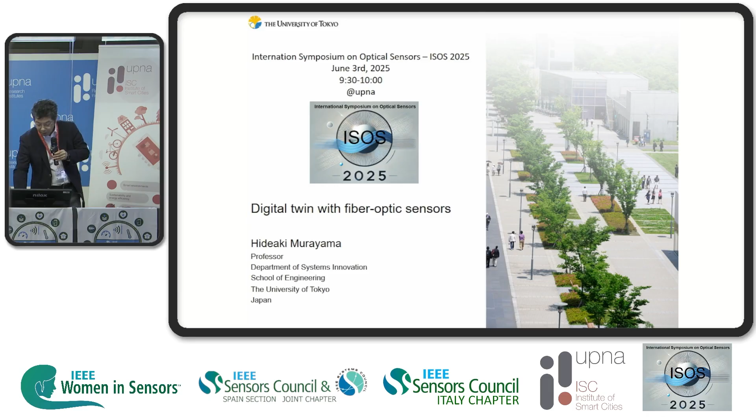But let me talk about my university. I'm coming from the University of Tokyo. It was founded about 150 years ago, and now we have about 30,000 students, and also 10,000 academic and administrative staff. An interesting thing is we have a lot of land. We own 0.1% of Japan, but our campus is very small. So we have a lot of forest, experimental forest for research, I think.

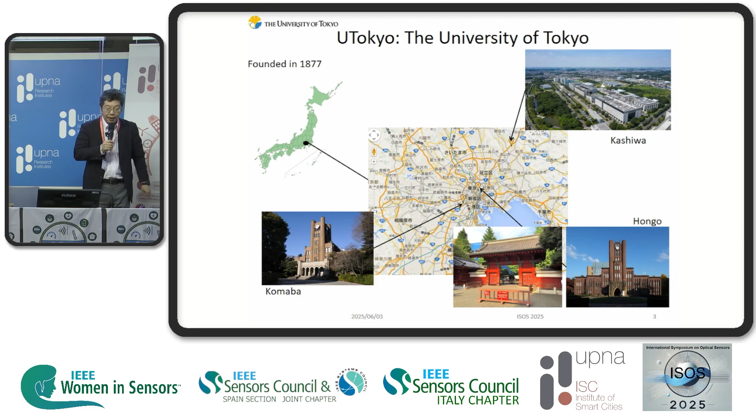As the chairman introduced, I was belonging to the School of Frontier Science, but this April I moved to the School of Engineering, and now I'm working for the School of Engineering. We have 3 campuses in Tokyo. Now I'm working in Hongo campus, and Daniel maybe knows the Hongo campus and Kashiwa campus as well.

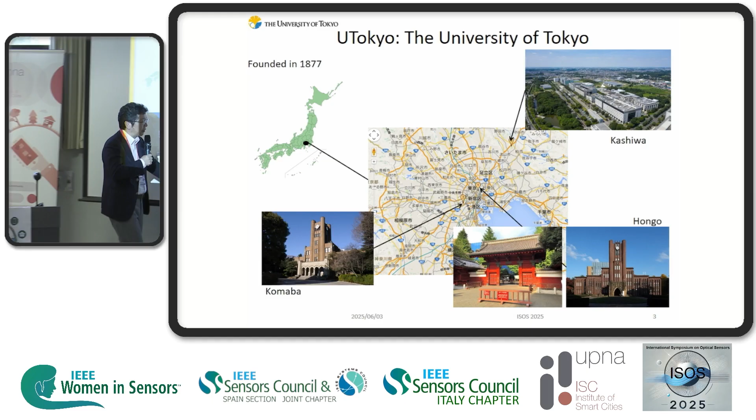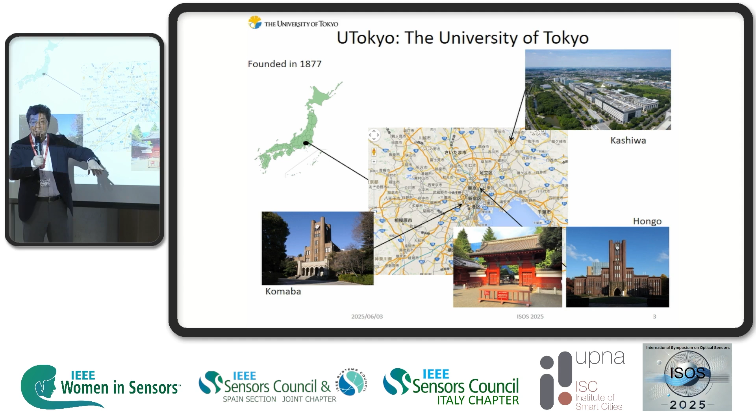Hongo campus is our main campus, and there is a famous gate in Japan. This is a red gate. We call it the Akamon. Aka means red, and mon is a gate. The Todai campus used to be the residence of a daimyo. Daimyo is a local king. So here used to be a big residence, and you can see the red gate here. This was built for the king's daughter, the princess, to go out of home for marriage.

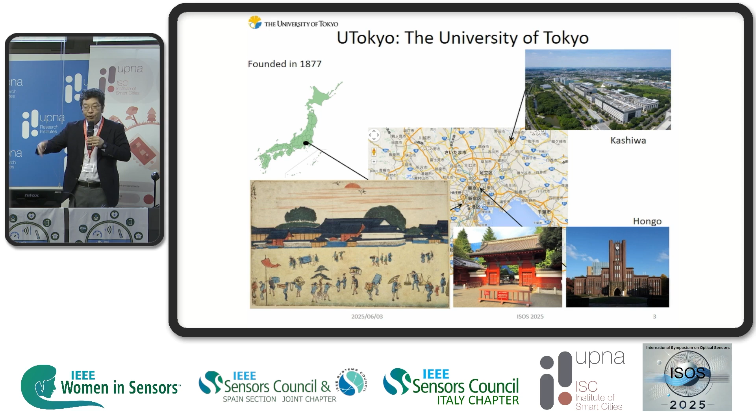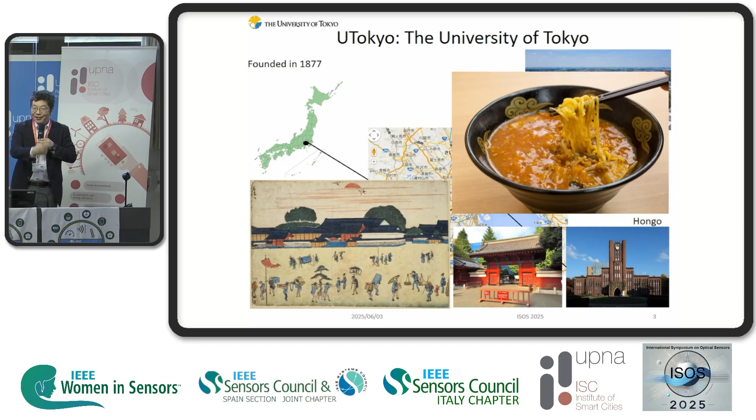And also this is a ramen, Akamon ramen, spicy, hot. So please, if you come to Japan or Todai, please try it. Very nice.

Please let me touch a little on the smart city issue. In Kashiwa, not me, but another professor has a project about a smart city with Kashiwa City, and they also have a smart city school for professionals, with students coming from industry and the government, I think. So they have a smart city school.

Today, of course, I talk about fiber optic sensors, and now I have a collaboration with NTT, which is the biggest telecommunication company. Today, I will talk about the collaboration with Kajima and Sekisui. Kajima is a construction company, and with Sekisui we are developing a pipe with a fiber optic sensor. It is a chemical company.

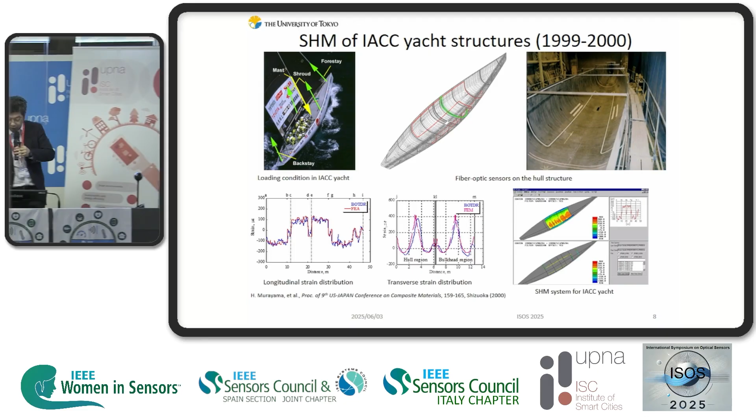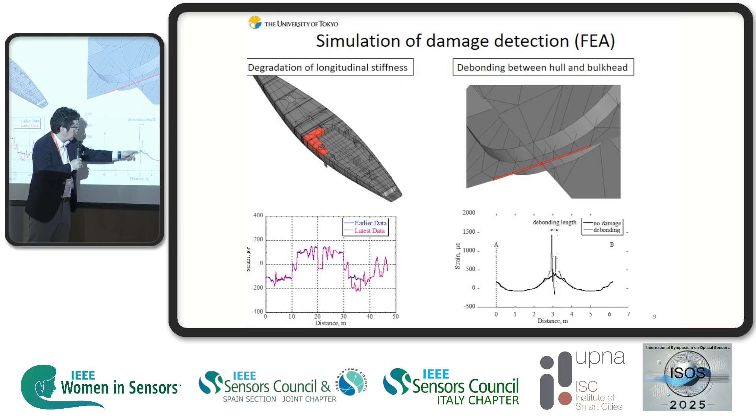But fortunately or unfortunately, we didn't have any damage. So in this case, I put damage in a computational model. If this is a bulkhead, and there is separation or debonding between the bulkhead and the hull, when the mast is pushing, we can see this kind of steep strain change. But if we measure strain, we cannot see any change.

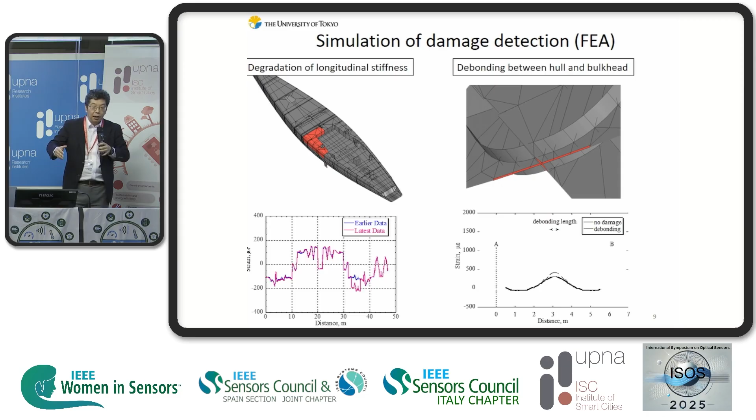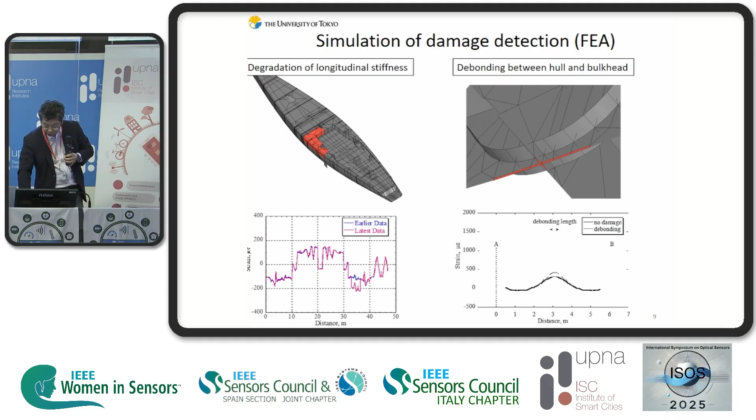This is because of spatial resolution. At that time, the spatial resolution of BOTDR was 1 meter. So basically, our strain information is averaged over 1 meter, and we cannot see this kind of steep change. So we need a higher spatial resolution. That was the story 25 years ago.

But in 2001, just after the America's Cup yacht race, we found this article. A researcher at NASA Langley Research Center published this paper. They are using OFDR, optical frequency domain reflectometry. In my case, I used BOTDR, that is Brillouin optical time domain reflectometry. In this case, they are using fiber Bragg gratings.

They put 800 fiber Bragg gratings along one fiber, and they can measure strain at each grating. The next year, 2002, we developed basically the same, but we used a long-length grating, 100 millimeters long. A typical gauge length is 1 centimeter. We can make such a longer grating continuously along the optical fiber, so we can measure strain distribution continuously. In our case, spatial resolution is 1 millimeter, so 1,000 times that of BOTDR.

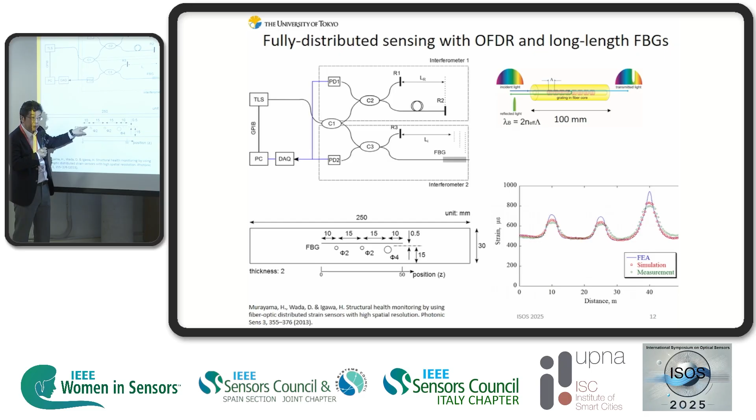If we use this kind of technique, we can measure strain distribution very precisely. This is an aluminum plate with 3 very small holes, with diameters of 2 millimeters, 2 millimeters, and 4 millimeters. Here strain concentration happens, and strain can be larger, like this. By BOTDR, we never know this kind of change, but when we use this technique, we can know the small change like this.

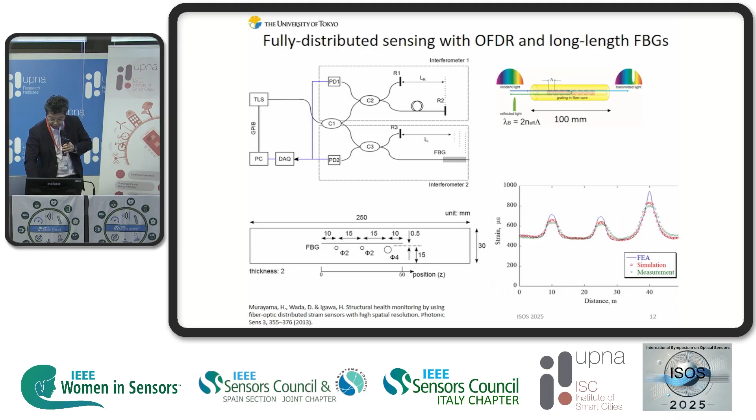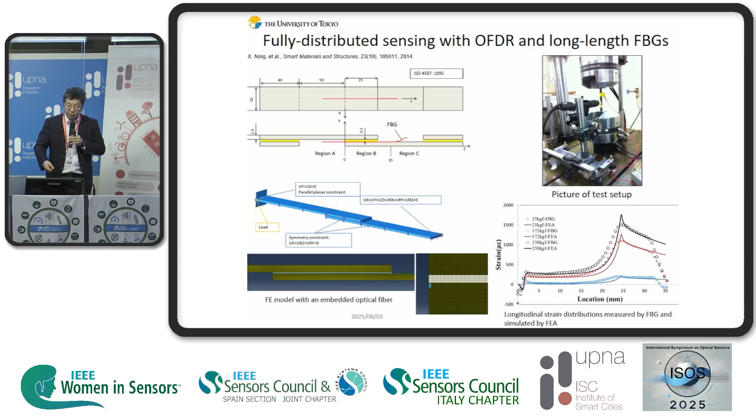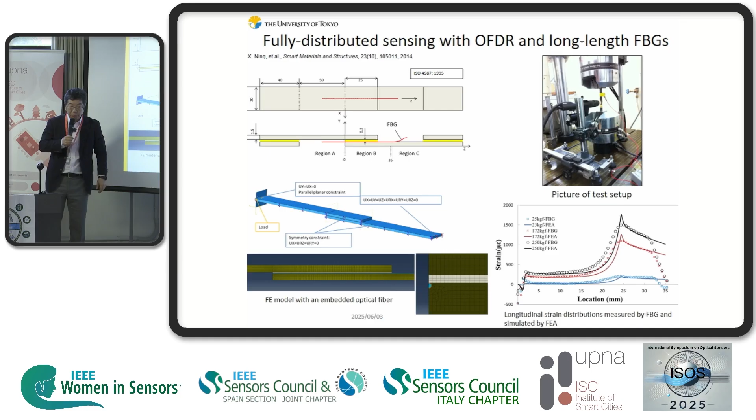Another good thing about fiber optic sensors is that we can embed them into the material. In this case, we embed the fiber inside the adhesive layer. We can calculate strain distribution by using the finite element method or a numerical calculation method, but nobody knows the actual strain distribution, and we can know that. And also, we can monitor strain distribution in real time like this.

And maybe, as Manuel said, there is a problem of cross sensitivity between strain and temperature. So if we add strain and temperature at the same time, we cannot separate them.

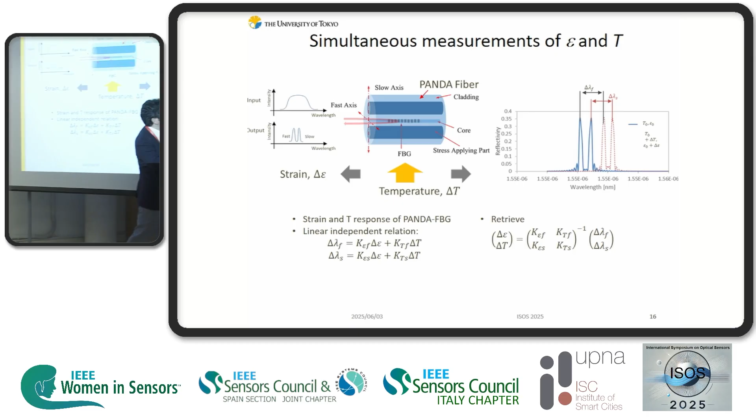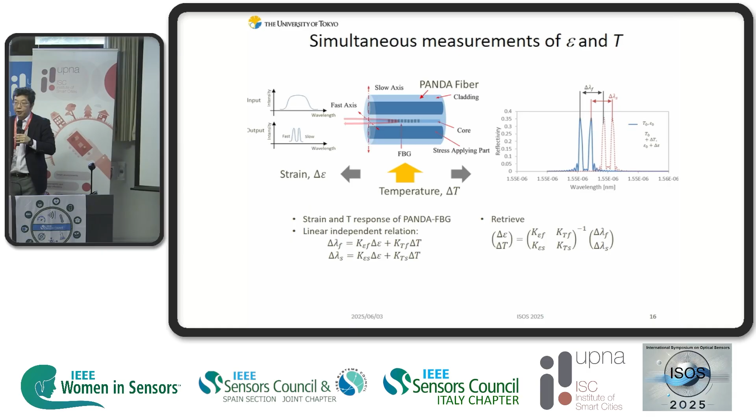That is a problem. So in our case, we can use a Panda FBG, which is a kind of polarization maintaining fiber. If we use this, we can observe a spectrum with two peaks, and these two peaks have different sensitivity to temperature and strain, so we can separate them.

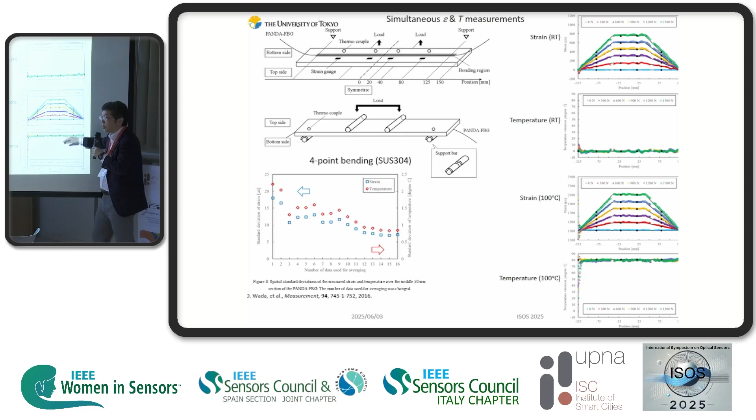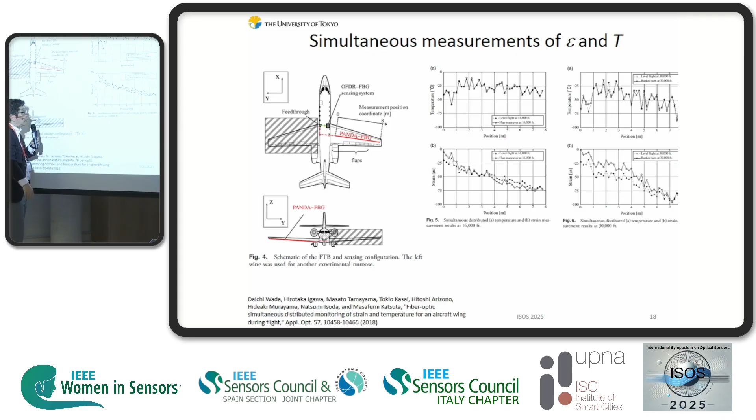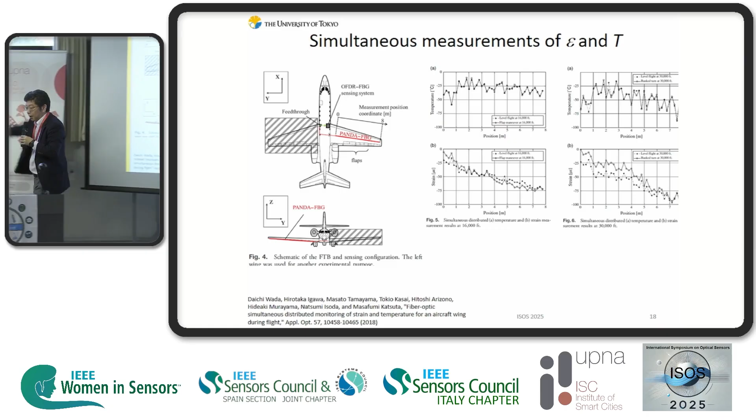But in the laboratory, we can have this kind of good, precise result. But when it comes to the real world, in this case we put an optical fiber sensor along the wing, and this is the strain distribution, and those are temperature. So in this case, 16,000 feet, and that is 30,000 feet. Altitude is different, and there you can see there is variation.

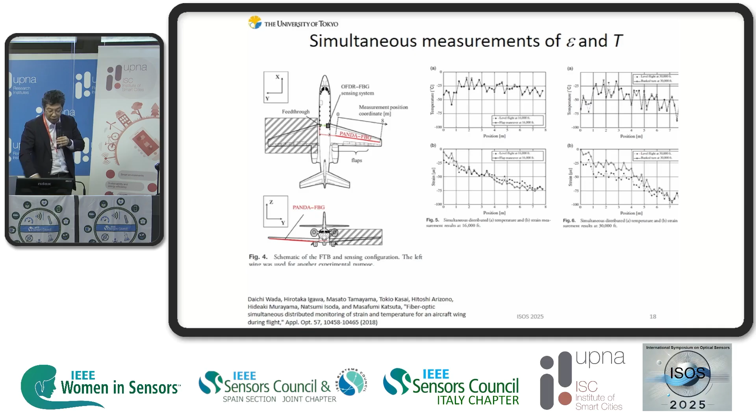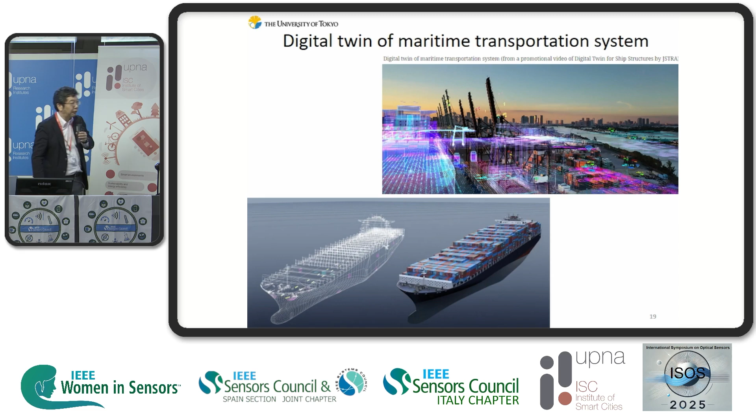I don't think this is real, so this has some error, I think. So I'm still working on that. And sorry, maybe I have to go to the digital twin issue. So now we are applying fiber optic sensors to develop a digital twin. We are developing a digital twin for ship structure.

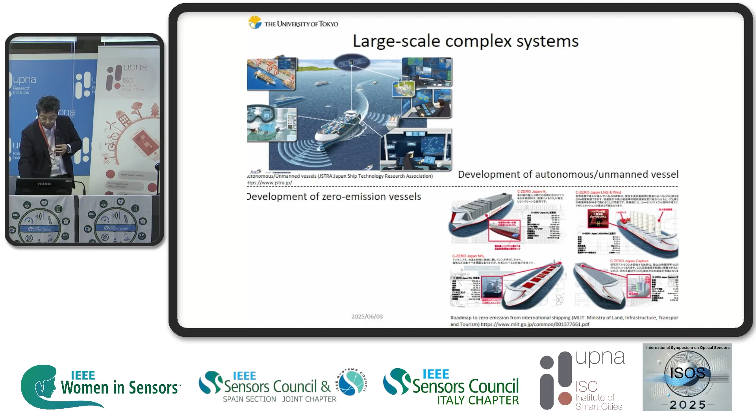So in the maritime sector, we have needs, demand for decarbonization and automation. And ships can become complicated. So we need to monitor remotely or automatically. That is a requirement. And also, ships are becoming larger and larger. So if we have an accident, it's very terrible.

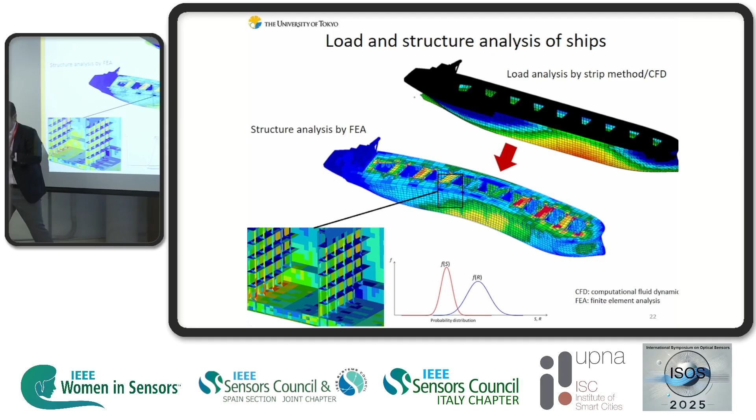So in the design phase, we do a lot of calculation, and we know the load and stress distribution on the hull of the ship. We look at this strain distribution, we check, and we say this is good. But in reality, we never see this. Maybe we could not see this. So our concept is very simple. We want to see this in a real structure. That is our digital twin.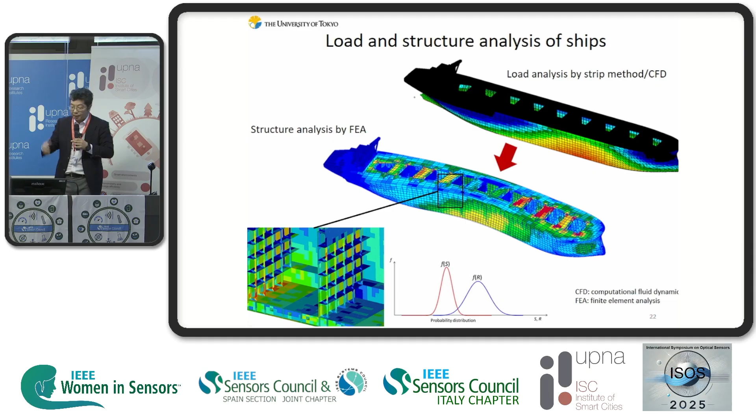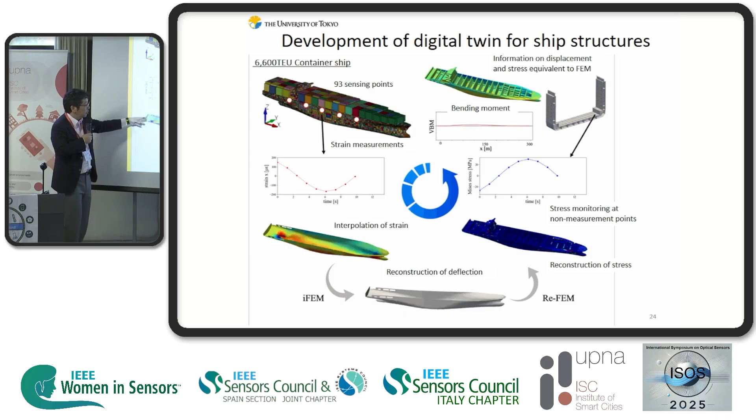And this is our procedure. We put sensors, basically fiber optic sensors like FBG, and we measure strain at a number of positions. And we do some calculation, basically iFEM, which means inverse finite element method, a kind of inverse analysis. We can calculate strain distribution from deformation; this is a direct analysis. But when we calculate deformation from strain, this is an inverse problem. So we use an inverse analysis.

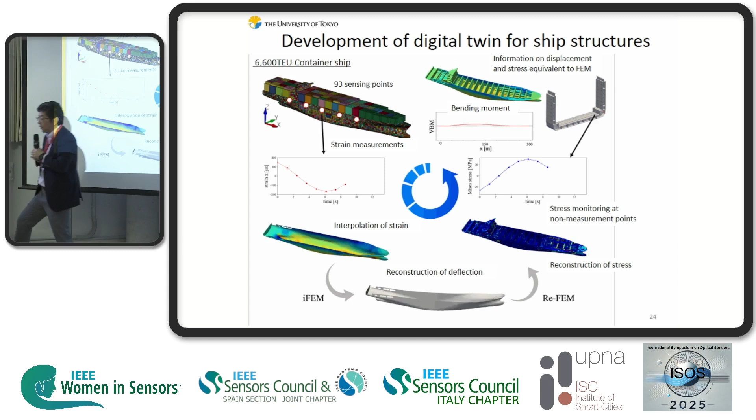But if we know the whole deformation, we can input that deformation into the usual FEM model, with every structural member. Then we can know the stress distribution, stress everywhere. So this is our concept.

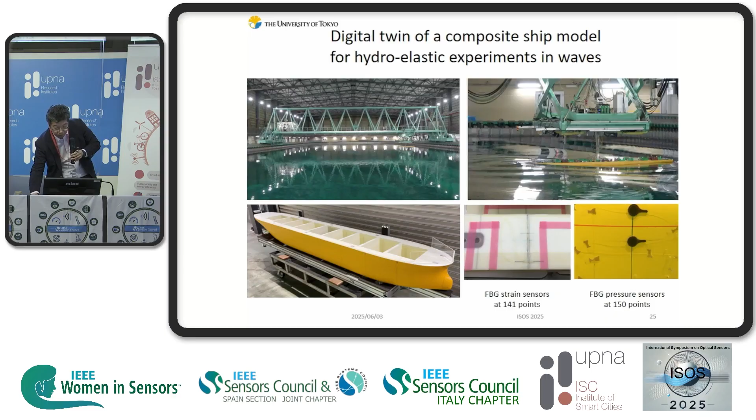So this is a tank basin, and we can make a real wave, and this is a model ship. The length is about 4 meters or something like this, and it is made of composite. And we put a lot of FBG sensors. And this is a kind of digital twin.

So we can monitor sensor output like this, and we use the sensor output to calculate the deformation like this. And basically we can calculate the whole stress distribution on the hull structure. So this is our digital twin for the model ship.

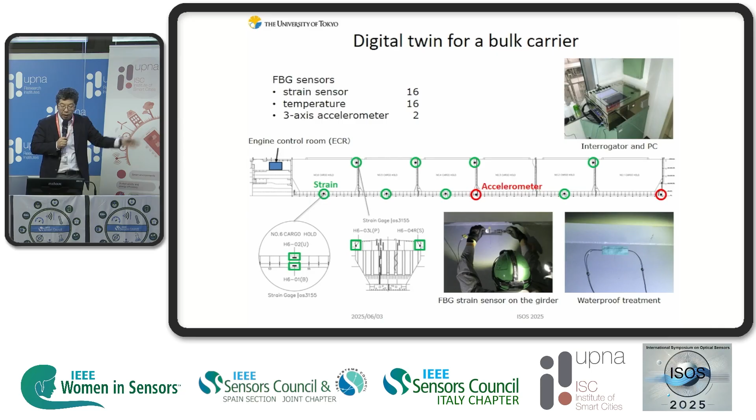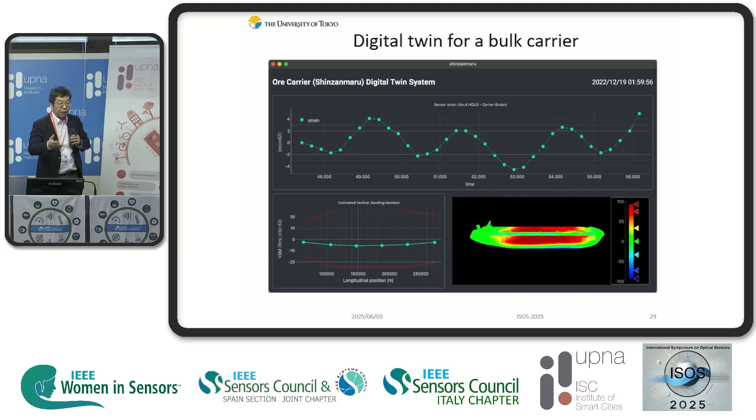And also we applied this technique to the real world. We put fiber grating sensors like this. And now this digital twin system is working like this. But basically, we look at this result, but now this is not practical, so only for research. Maybe I need to speed up.

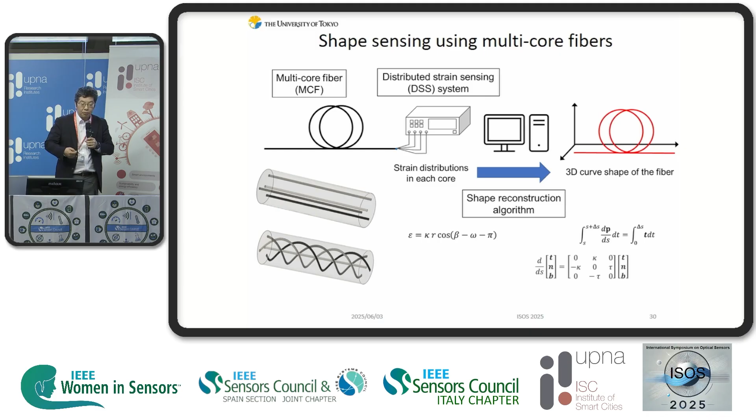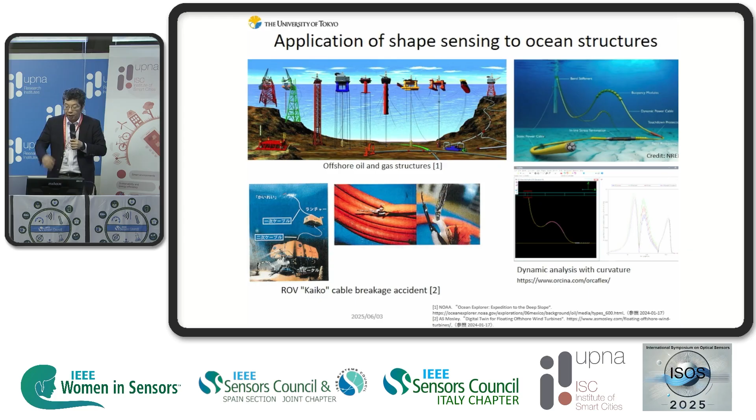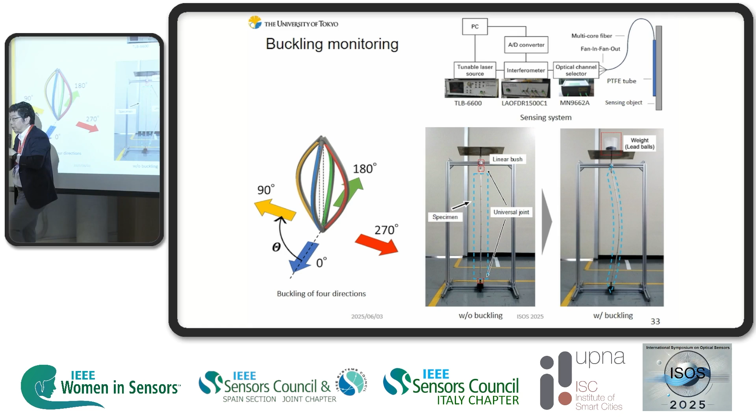So for example, this is monitoring of a rod. The rod has buckling. This is a rod, and this is a buckling phenomenon. If we bond fiber to it, maybe the fiber breaks, because there is a large strain. But in this case, we put a tube along this rod, and we insert the fiber. So the fiber has no stress, but the fiber changes shape.

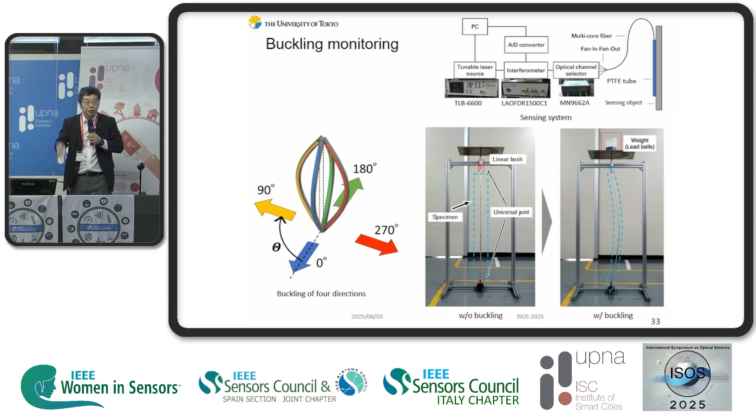And we measure the shape of the fiber, I mean multiple fibers, and we know the shape of the rod, and we know the condition of the rod, right? Something like that. And actually, we can reconstruct the shape like this.

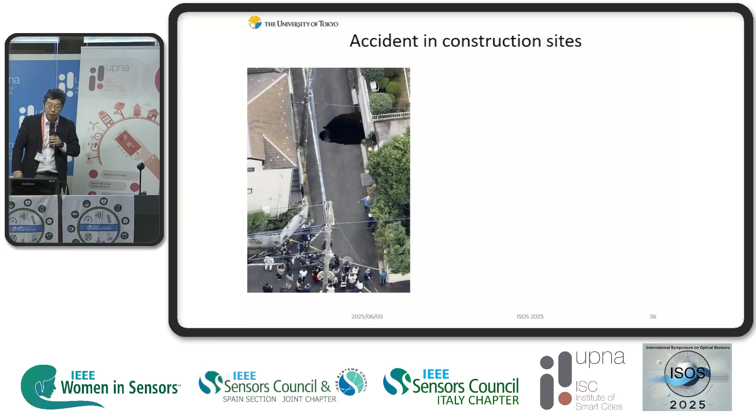Okay, and this is the final application. As I said, now we are working with a construction company. This is a problem which our collaborator made.

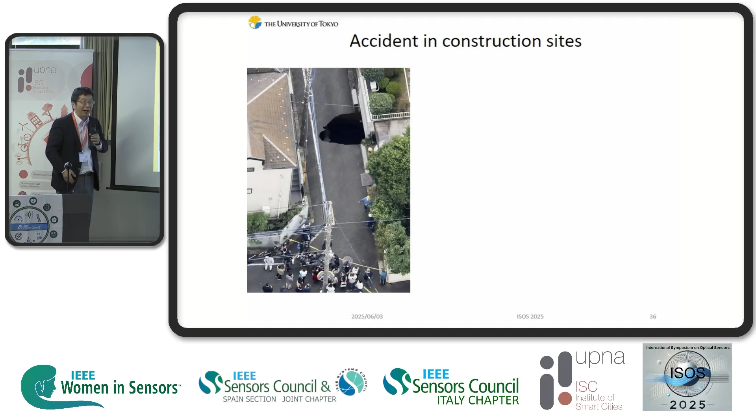So they are digging under the road, and the road was broken like this. So maybe they paid a lot of money for this accident.

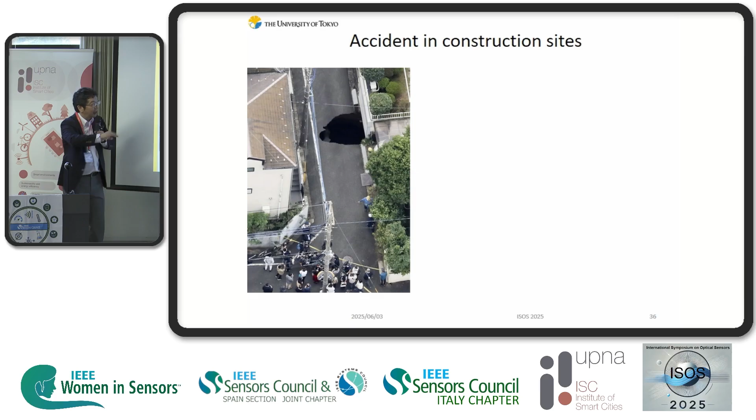And also, this is a little bit shocking video. So maybe the hole happened, and then a truck is coming.

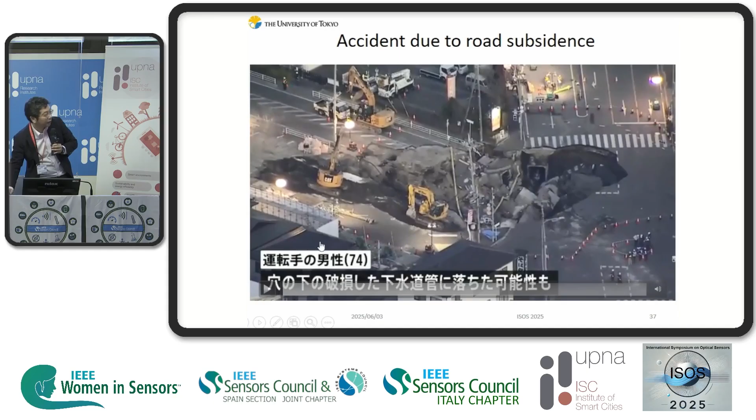Yes, but unfortunately we couldn't help him. He was alive, but we couldn't help him for 1 week or 2 weeks, so he died.

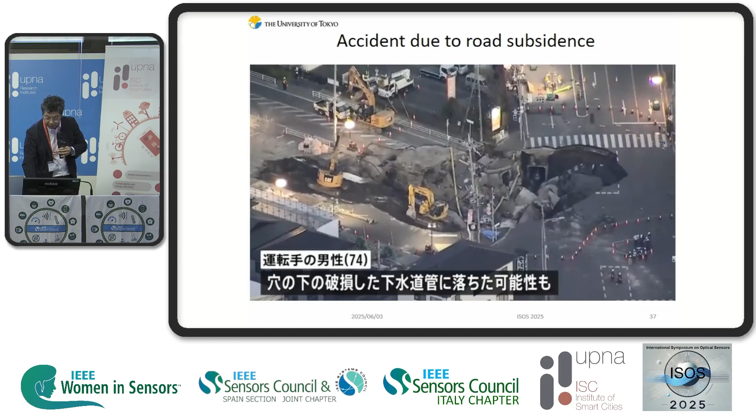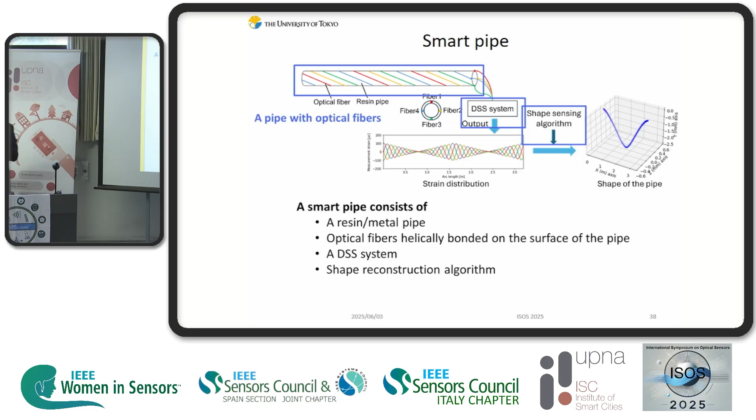So that is our concept. Maybe a cavity generates under the road. So maybe if we monitor small deformation or small motion of road or soil, maybe we can find something or avoid this kind of accident. So now we are developing a smart pipe, or iPipe.

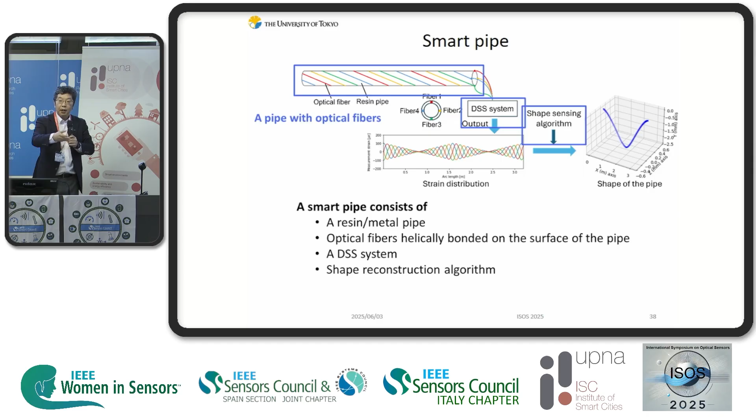So this is a kind of shape sensing, and the algorithm is the same as what I showed. This is a pipe, and in this case we put 4 optical fibers along the pipe. We measure strain distribution along the fiber, and we can reconstruct the shape of the pipe.

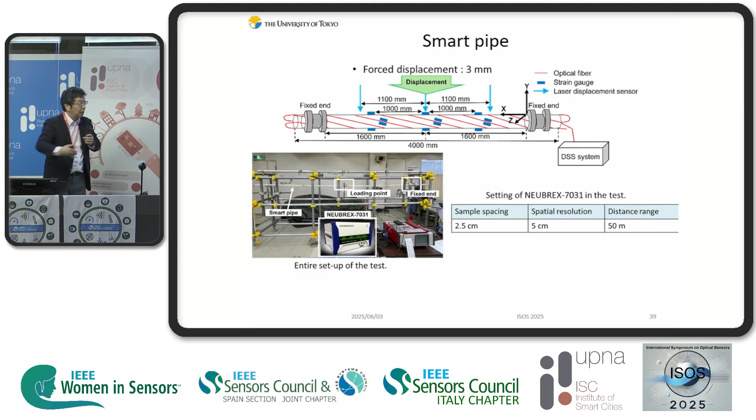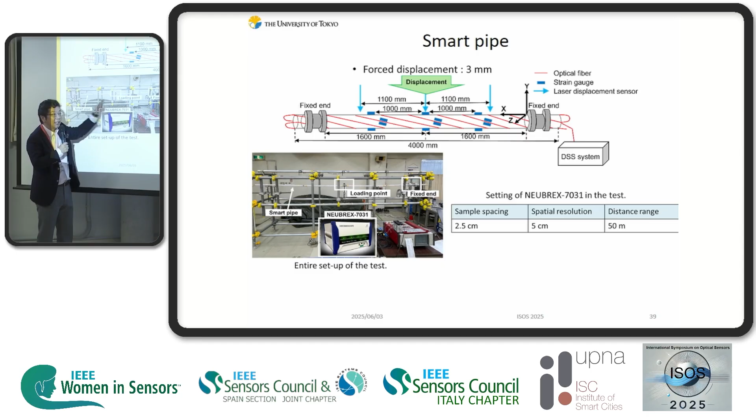So this is the strain distribution. If we look at this shape, we don't see any deformation. But the fiber, our shape sensing technique, knows the deformation. So the deformation has changed, we know like this.

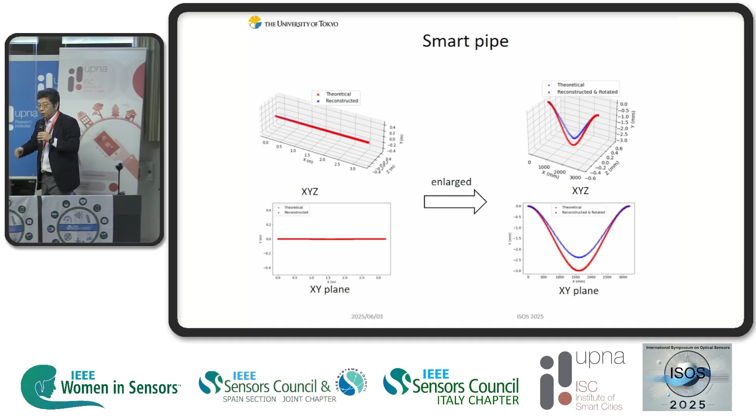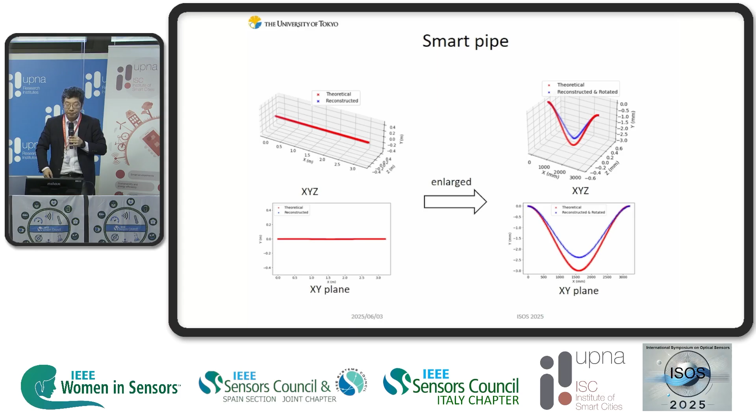The red is theoretical, and the blue one is the reconstructed shape. So now we are developing this kind of technique, and we are planning to use this smart pipe at a real construction site. We want to make a digital twin of a construction site, so we can make it safer and also more efficient. This is our concept. Thank you very much.